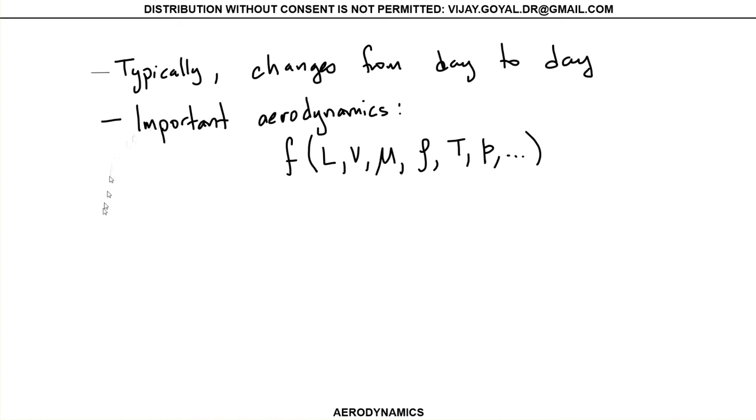Another thing that is very, very important that we will talk about today is the density. The density is a very important quantity and is a function of pressure and temperature. Okay, so this is pressure and this is temperature. So you can immediately see that different temperatures and different pressures are going to give me different values for my density.

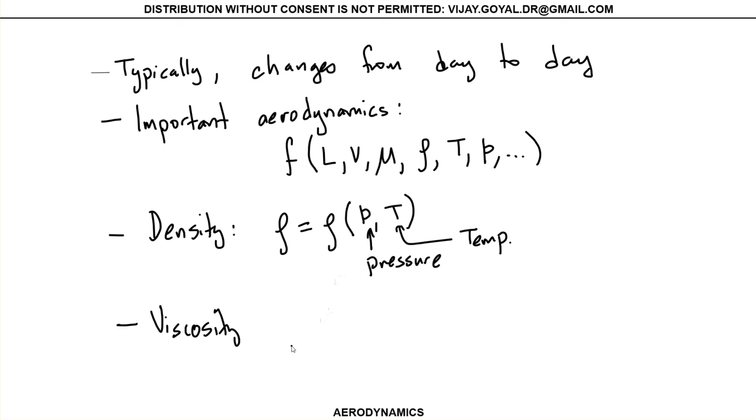Another term that's very, very important is viscosity. And viscosity is a function typically only of temperature. There are many equations that we can use to study this that can help us better understand these aspects. So first, to define viscosity: viscosity, in general, is a function of the gas.

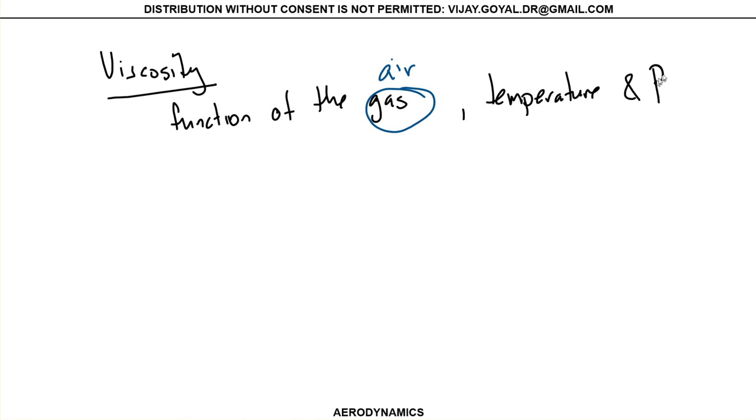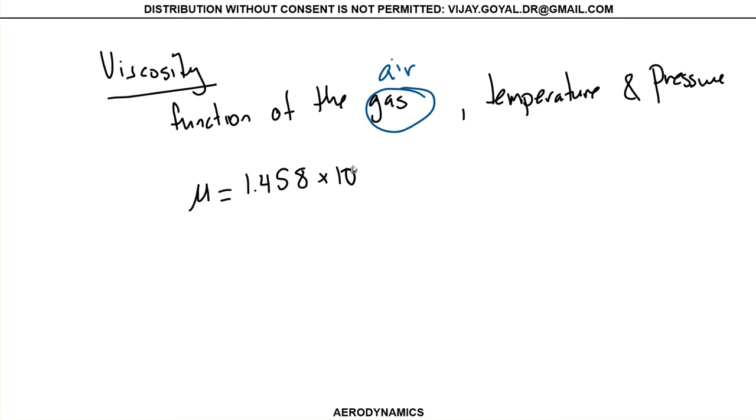Here in this problem, the gas that we are interested in is air. It is a function of the temperature and pressure. Okay. And so for most cases, you can approximate viscosity using the following equation: 1.458 times 10 to the minus 6 times T to the 1.5 divided by T plus 110.4. This is for gases with a temperature less than or equal to 3000 Kelvin.

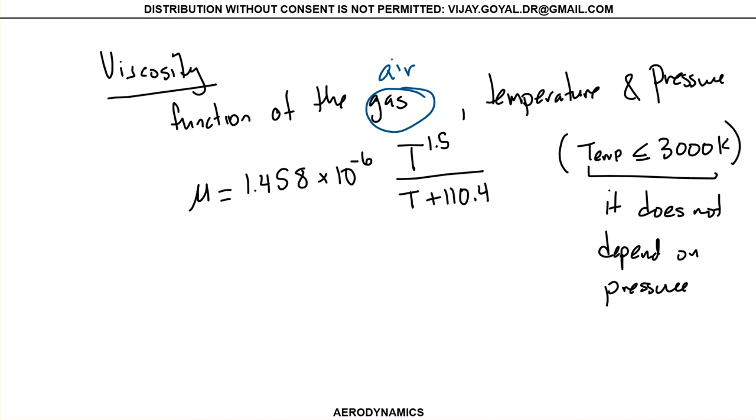And if it's less than 3000 Kelvin, the viscosity does not depend on pressure. Okay, so for that range, this is perfectly valid. With that said, let's see some equations that are important that we'll be using throughout the class today. Before we go to the equations, let's understand what the atmosphere looks like.

So one of the things that you have to keep in mind: this is your troposphere, stratosphere, mesosphere, thermosphere, exosphere. Okay, so satellites are typically here in the exosphere. If I have a satellite, this is the location where they will typically be. The thermosphere is very, very hot. It's typically where your space shuttles or spacecraft will go. That's where they will fly.

The mesosphere is very cold. Right here is very cold. And then the stratosphere is where your jets fly. Okay. This is where your military aircraft may fly, but typically somewhere between here and here, very close to here, is where your airplanes fly, like a Boeing 787, etc.

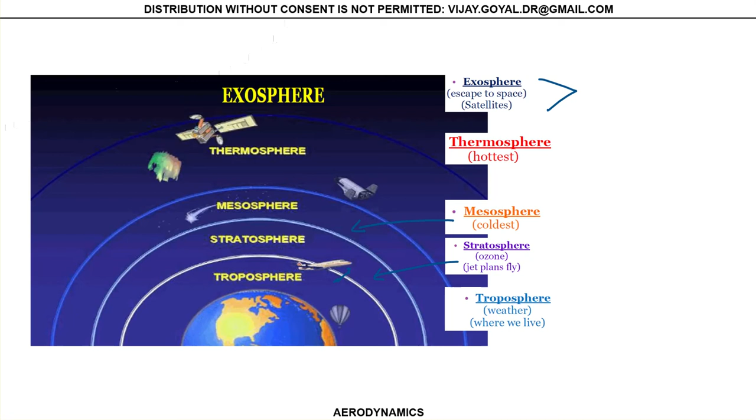Okay, so if I look at a typical temperature distribution, it's going to look something like this, where this is the altitude. So this is as I go up in height, and at 0, this is sea level. Okay, and this is where your jets fly, typical jet streams.

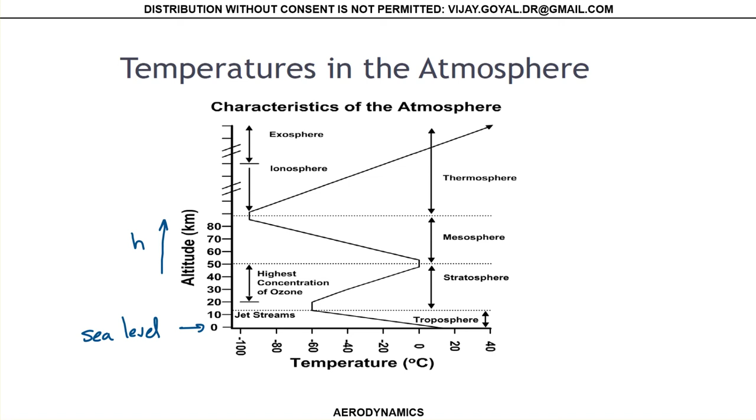This is where the jet streams are, and in this particular table, what we can do is take this and zoom in on this section right here that becomes very, very important. This section right here, I'm going to zoom that out.

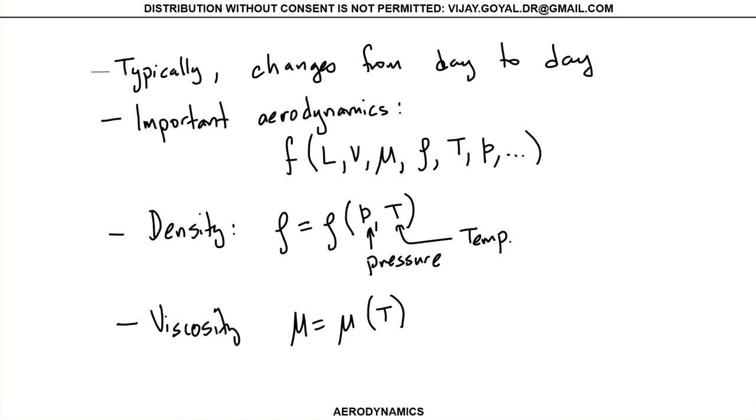So your book has a couple of nice charts. Table 1.1, let's say, basically tells you how to find the viscosity for different temperatures. So typically what we do is we come in this table and we will find the temperature that we have. We may interpolate. Once again, I just wanted to go over the interpolation. I know we went over this in a simple example. The interpolation consists in the following.

So if I have a line, I know a value here, let's call that value x1, and its corresponding value y1. I have another value here, let's call that x2 and y2. Now, I want to know what is the value y if I knew this value, let's say x3. So I am very much interested to know what is y3. In order to do this, we can use the slope equation. This is linear interpolation. We use this very much when we use these tables. Assuming linear interpolation is valid, we know the slope equation is y = mx + b, right? So the problem reduces to find these values.

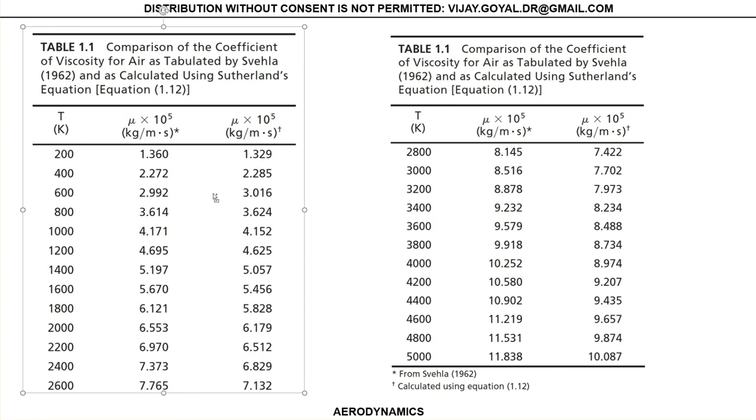Let's do a very quick example, just so you can understand how this works. So let's suppose I want to find the value here at 500K, I would like to know what the value of mu is. And I know these two values. Let's suppose this is my y. So the equation looks like mu is equal to (mu2 minus mu1) divided by (T2 minus T1), multiplied by T, plus B.

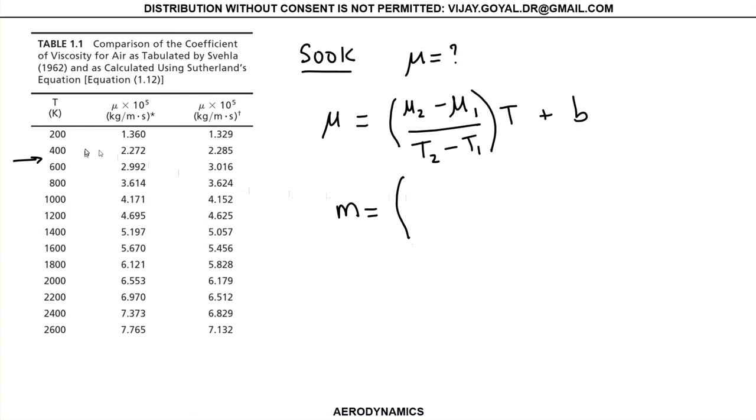So your slope would be between these two values. This would be 2.992 minus 2.272 divided by 600 minus 400, and that gives you a value of 0.0036. So now you have mu equal to 0.0036 times temperature plus your intercept. To find your intercept, use either one of the values. Let's say I'm going to use this value, 2.992.

0.0036. Again, I'm using this value right here, multiplied by 600, plus our intercept b. So b will be equal to, so the value is 0.832. That means your new equation then will be mu is equal to 0.0036 multiplied by T plus 0.832. That means if I knew my temperature here, then I replace that and I can find my mu.

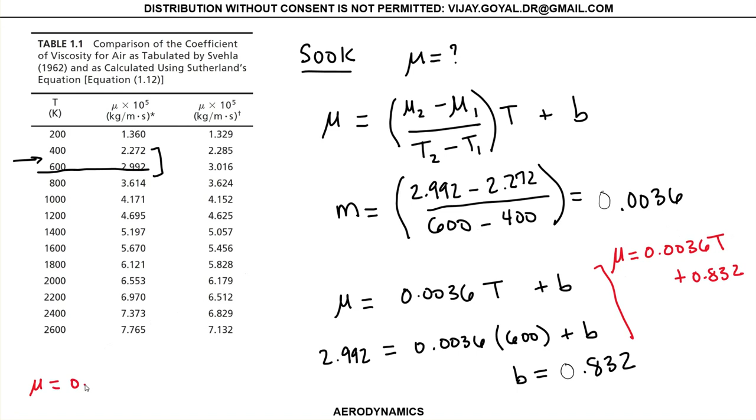So for our particular problem, we know that your mu will be, this is the mu I'm interested in over here, for this particular value, 500 K. So 0.0036 multiplied by 500 plus 0.832, and that would give you a value of 2.632. And don't forget, all these values were multiplied by 10 to the 5.

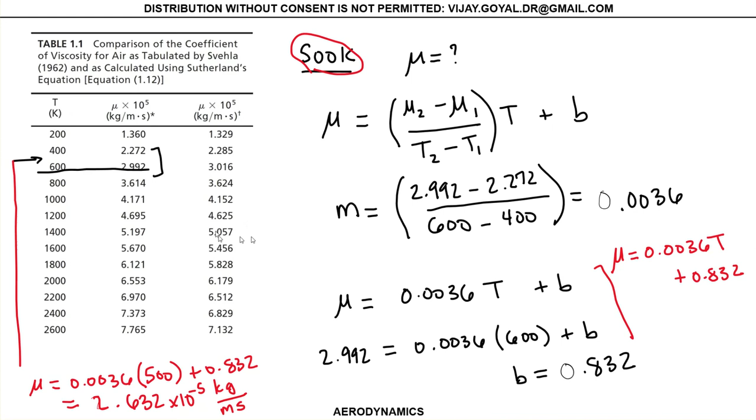So this value is 10 to the minus 5 kilograms per meter second. Okay, so this is minus 5, it cannot be plus 5. It doesn't make sense. Okay, so that's how we do linear interpolation. Just a quick review in case you have never seen that.

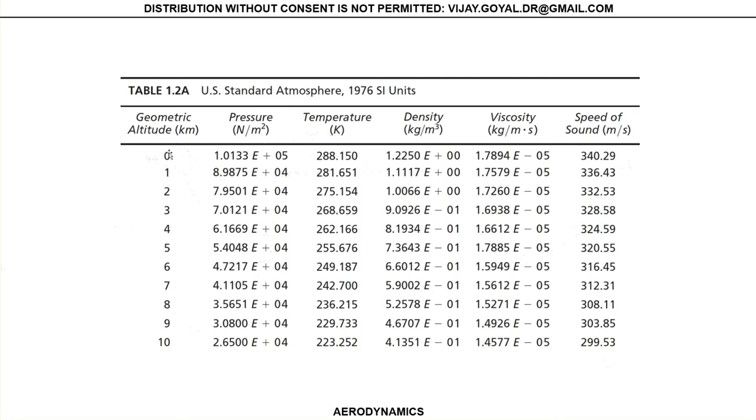Then we also have various atmospheric pressures for different altitudes. You can go and find different pressures, temperatures, densities, viscosities, and speeds of sound as well. Your speed of sound also changes with height. So this is a typical value at sea level. Anytime you see zero, we are talking about sea level. And this table continues here, up to 20 kilometers.

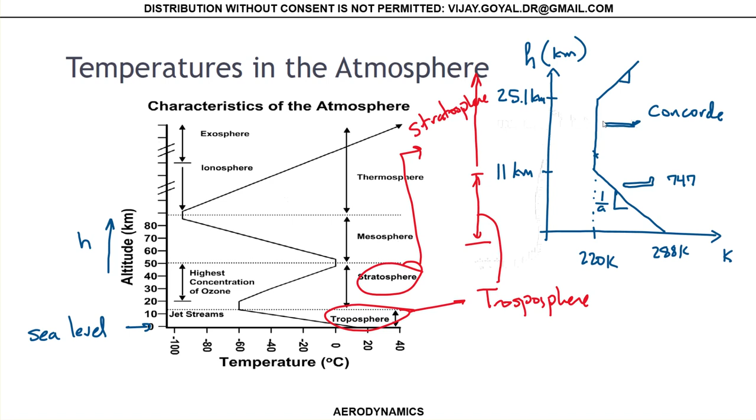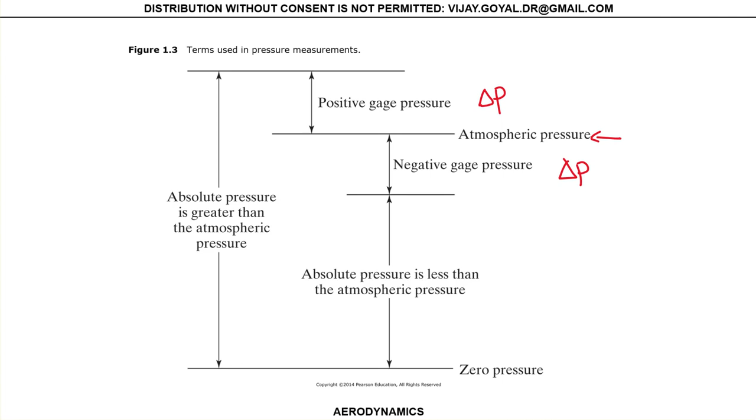So the gauge is reading your delta P, it's reading this difference. And this is important: this is the absolute pressure minus your atmospheric pressure. Okay, so with that said and done, let's continue with our discussion now. What are the equations that we actually need? We need a couple of equations so we can understand this whole thing.

So let's go back to my black marker. The first equation we talked about last time is the ideal gas equation. The ideal gas equation says the pressure is equal to the density times my gas constant times my temperature. Okay, this is an empirical equation and it was derived for ideal gas. Also, for the case of hydrostatic pressure, the hydrostatic equation is given by the following equation.

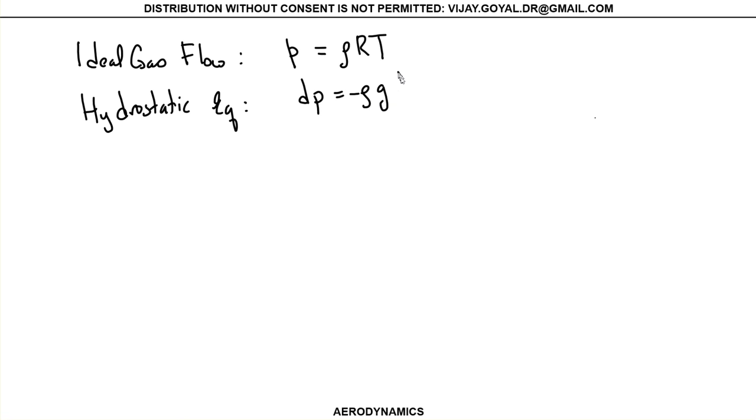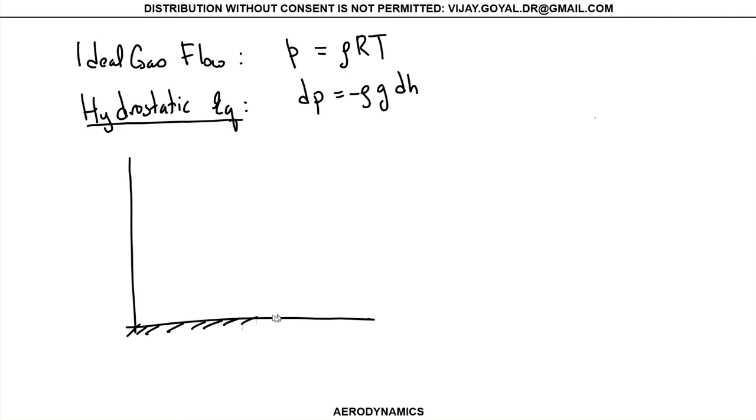Okay, dP equals minus rho g dH. To better understand the hydrostatic equation especially, let's go ahead and derive this equation, where it comes from. So this is your ground, h is your height, and if I took a small segment right here where this is dH, a small differential dH. So this d is not a distance. This is talking about a differential. It's like talking about delta P related to delta H.

So if I make this delta very, very small, then I can make it dH and dP. So what I basically want to do is, this is whole air, and let's suppose I want to just take a small cube of air, or maybe just take an element. Let's call it the element of air.

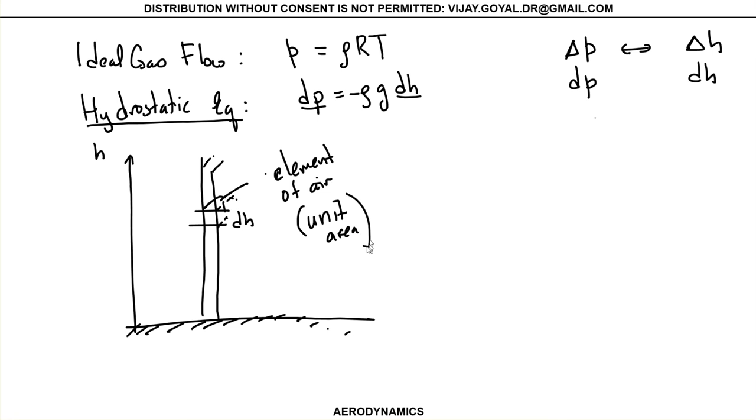So don't think all distances are 1. Okay, so in this element of air, we're going to consider this is an element of unit area. So if I take this element and I draw it again, my element is going to look something like this.

So I have pressure at the bottom, P, and then I have a delta H, the difference. And what you can immediately see is that I'm going to have the same pressure plus some differential pressure that's acting on there. Okay. So what I'm going to have is areas at the top and the areas at the bottom. This is area, element area.

So the differential equation then is going to relate the variation of P as a function of the variation of H and the local value of rho. This is what this equation is saying, and this basically comes from here. Consider this. If I take a sum of forces in this direction and make it equal to 0, a static case, what you will have is positive P minus P plus dP, and this is minus rho g dH, okay, equal to 0, because there is also gravity acting on this, since it has a mass.

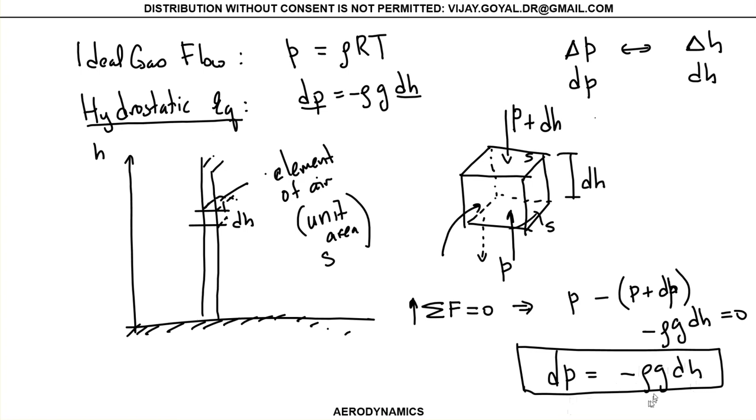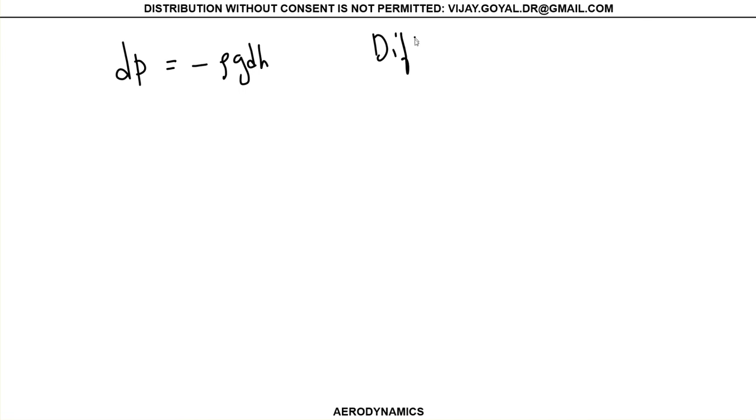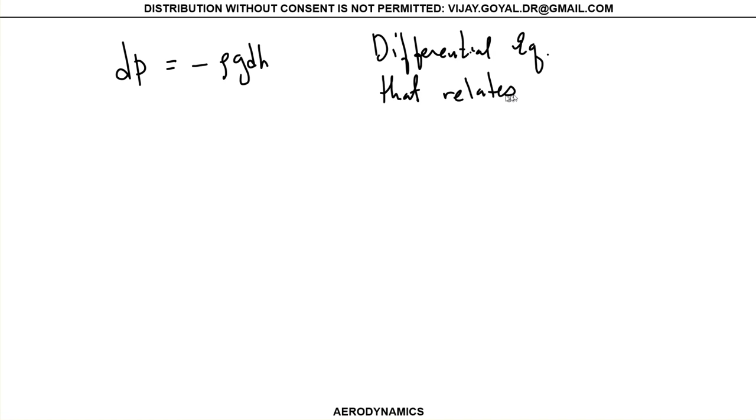Okay, so that particular equation, let me write it down again for completion. This is nothing else than a differential equation. This differential equation relates the variation in P as a function of the variation in H and the local value of rho.

Okay, we are going to assume that your gravitational constant remains the same. Okay, it's a constant. So for small deltas in H, your g doesn't change that much. Okay. So let's keep moving on. We also know from ideal gases that P is equal to rho RT.

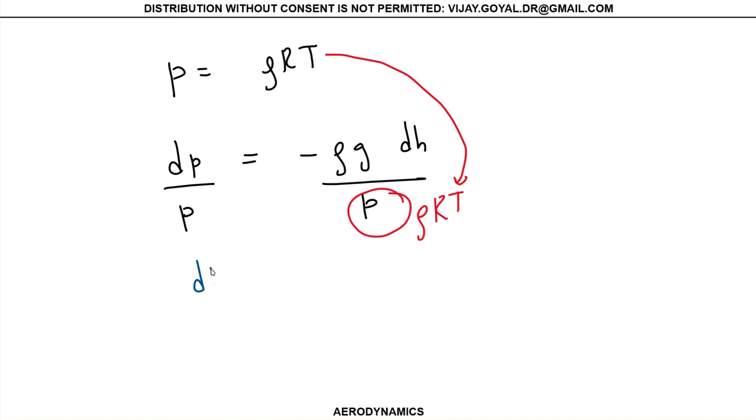So what I could do is take dP equals minus rho g dH, and I could divide both sides by P. But now just realize that for P I can put nothing else than rho RT, from the ideal gases. Okay, so by doing that, your equation now becomes dP over P, the rho cancels out, so we end up with minus g over RT times dH. Okay.

So this equation has different ways of solving it. First of all, you have to know this equation becomes very easy to solve in this region over here. As I mentioned to you previously, your variation looks something like this, where this region is 11 kilometers, and this is about 220 Kelvin. From here to here, this is the stratosphere, okay, and it's constant.

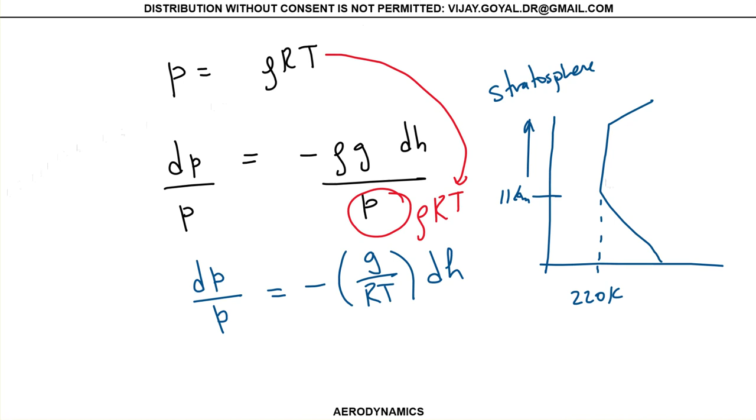So for that particular region, in the stratosphere, T is constant, as I just mentioned to you. Okay, so that means my equation then becomes something like this: dP over P equals minus g over RT times dH. And note what I'm going to do now. This is all constant. So now I can integrate on both sides.

If I know a point, let's say P1 to P2, and H1 to H2, this integration will give you the natural log of P2 over P1. This is the natural log. And this is a constant, so the constant remains outside. And this is a straight integration, so this is H2 minus H1.

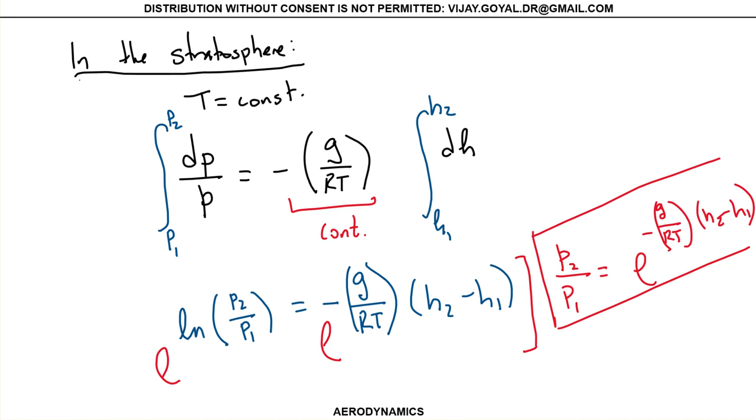Now, there's a couple more things that are very interesting that we can also do. Since we know that P1 is equal to rho 1 R1 T1, and we know that P2 is equal to rho 2 R2 T2. This is from ideal gases.

Okay, so if I check now my equation and I have P2 over P1, I can immediately see this is air, so R is actually the same value, and in the stratosphere, T1 is equal to T2 is equal to T. This is because we are working in the stratosphere region. So then my whole equation becomes rho 2 R2 T2 divided by rho 1 R1 T1.

Okay, I'm taking these values and plugging them inside here. And I already showed you that this was actually equal to e to the minus g over RT times H2 minus H1. So these are constants, so these go away. So basically what we are saying is in the stratosphere, only in the stratosphere, P2 over P1 is going to equal rho 2 over rho 1, and this is going to equal e to the minus g over RT times H2 minus H1.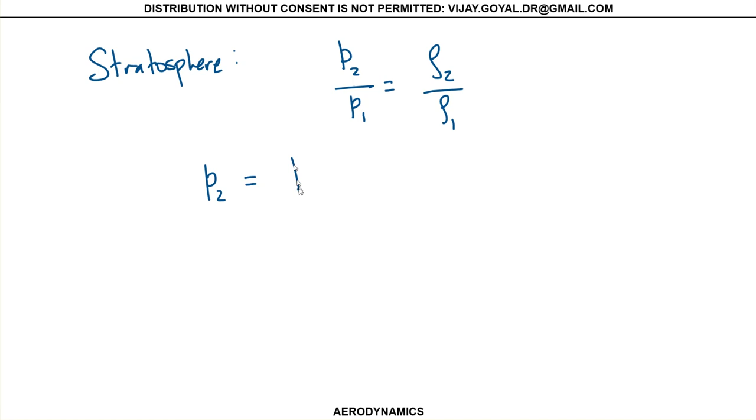You can show first of all that P2 over P1 is the same as rho 2 over rho 1. That's one relationship that's very useful. The second relationship that will be very useful is knowing that P2 equals P1 e to the minus g over RT times H2 minus H1. You could also say rho 2 is equal to rho 1 e to the minus g over RT times H2 minus H1. So we can use these equations, and this is where these tables come from. All the information I gave you actually comes from these tables, and this is what you can use.

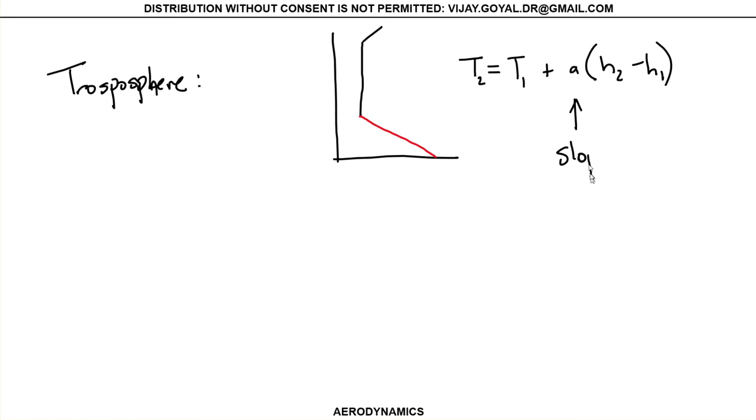Now let's move on to the more complicated region. What happens when we have a gradient layer? In the gradient layer case, that's the case of the troposphere. We are talking about this region right here. Now, for this particular region, things get a little bit more complicated because my temperature is not constant. Actually, what I know is that my temperature T2 is equal to T1 plus A times h2 minus h1. This is the slope of this line, and that slope A is defined as delta T divided by delta H, and this is called the temperature lapse rate.

Temperature lapse rate. Okay, so we know this, and from here I can solve for delta H. Delta H is equal to 1 over A times delta T. And now you can immediately know what I will be doing. I'm going to start with this equation again, dP equals minus rho g dH. You see, this is the same, so I'm going to plug this inside here.

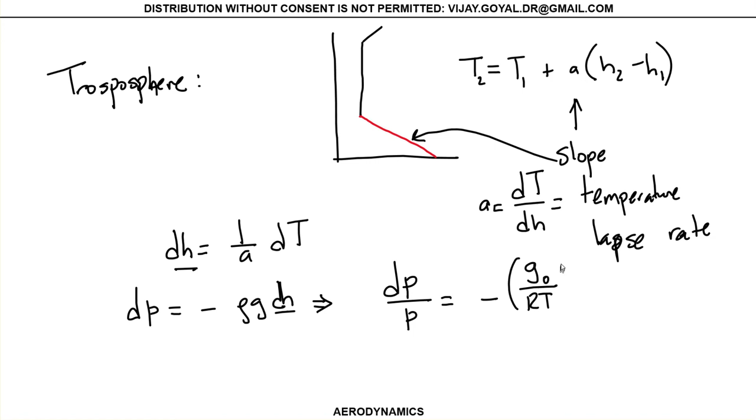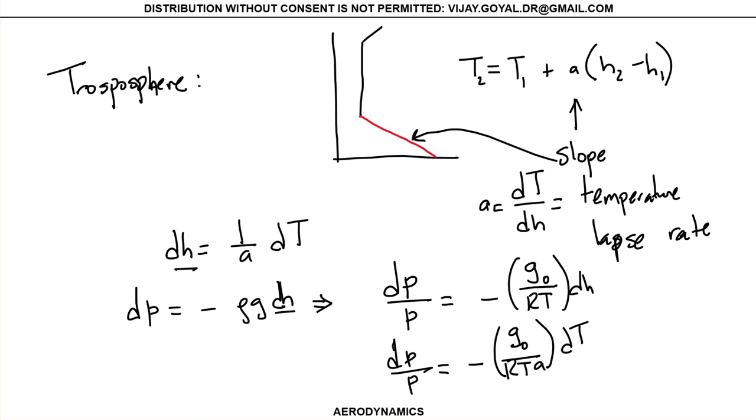And there's also another variation, I gave you this earlier. If I divide both sides by P, dP over P equals minus g over RT dH. So I can plug this inside here, and you find dP over P is equal to minus g sub 0 over R T A dT. Okay, so now I could go ahead and integrate on both sides.

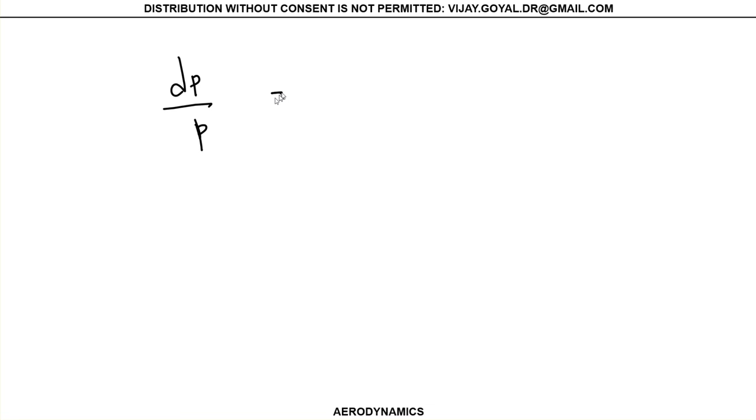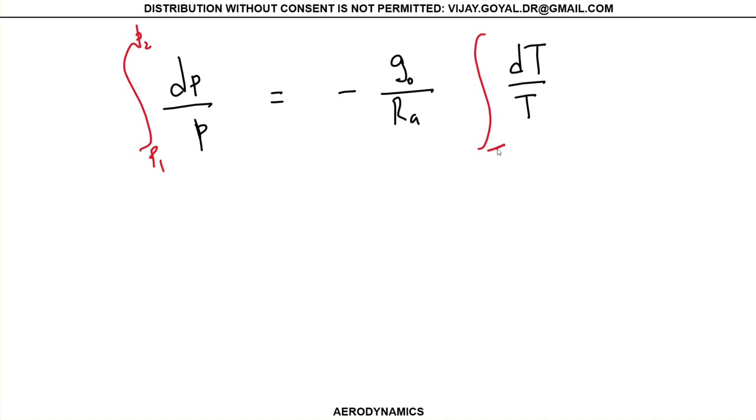dP over P will equal minus, and I am so sorry for all this derivation here, but it is important that you understand the consequences of what we are actually trying to do here. So I can integrate here from P1 to P2, and I integrate this from T1 to T2. So if I did this integration now, the integration looks kind of similar to what I had before.

P2 over P1 minus G over R times A, natural log of T2 over T1. Sorry, there's a 2 missing there. And what I could also do is, again, I could elevate to the exponent. And we know the exponent of the natural log is equal to what's inside here. So we could show that P2 over P1 is actually equal to T2 over T1 to the power of minus G over R times A.

Okay. Also, just knowing from our previous relationships, if we just compare the ideal gas law, P2 over P1 is rho 2 R T2 divided by rho 1 R T1. The gas constants go away. So now your relationship becomes rho 2 T2 over rho 1 T1. Okay.

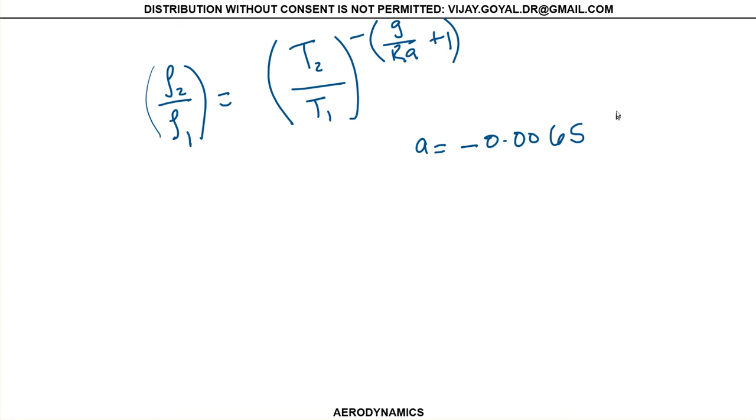So if we combine all the terms, what you can show is that rho 2 over rho 1 is equal to T2 over T1 to the power of minus G over R times A plus 1. Okay? And for air, and for the troposphere, you can show the lapse rate is equal to -0.0065 K per meter. So that value is given. And the equation actually becomes a little bit crazier in how you evaluate all these terms.

But the way you do these problems is you have your problem, right? So you go from here to here and here. When you start this, you're going to start right here. Why? Because you know the values there. You know rho 1, you know your P1, and you know your temperature 1. These are the values at sea level, okay? I'm going to use SL for sea level. So anytime you see SL, refer that to sea level, okay?

So from here, I can use the last relationship I just found to find my rho 2 and my P2, okay? To find rho 2, you can just say rho 1 multiplied by T2 over T1 to the minus G over RA plus 1. And then P2 would be P1 multiplied by T2 over T1 to the minus G over R times A. Okay, so this is this value right here.

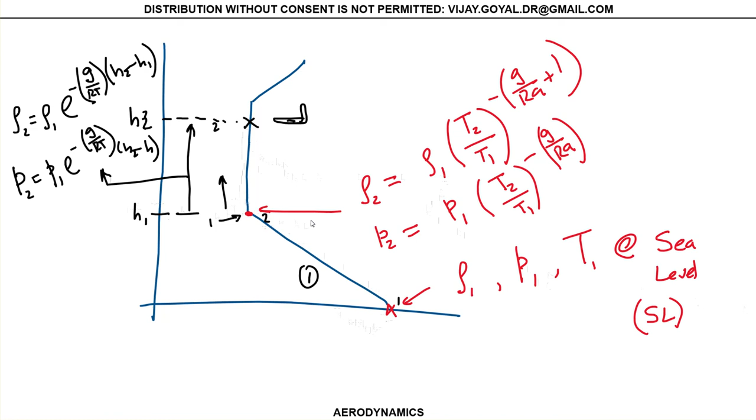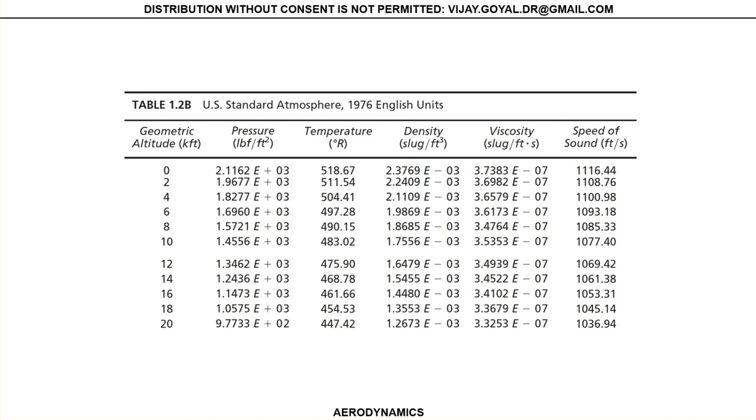But typically, if I say a plane is flying at a location, then you want to go from here to here, and from here to there. And it's a good idea to have these values handy. I would like to invite you to actually do these calculations by hand, and to show that indeed the values you get in these tables are the values that we use. From here we will move on to do one or two examples to understand all this. But this wraps up the theory part of the atmosphere.